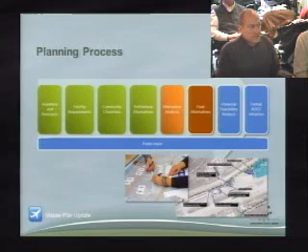The next slide you've seen many times, but I'll just note that we are in the final alternatives portion of the process, and we are beginning to approach the end of this process, so we can bring you a set of documentation and alternatives that you can be comfortable reviewing and approving, hopefully in the April timeframe, which is what we're shooting for.

The concepts you're about to see have been developed through an extensive process with the community: surveys, charrettes, a long list of study committee meetings with broad participation from various interested parties, and presentations to yourselves, the City Council. It's been a long and extensive participation from the community. The charrettes were well attended, and we feel we got great input through our public outreach process that has gone into the refinements you're about to see.

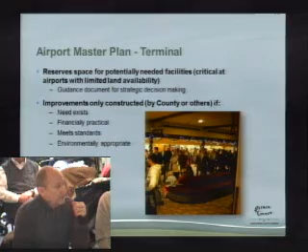What is the airport master plan with respect to the terminal about? We're reserving space for potential facility needs, which is critical at this airport because we have a very confined buildable envelope. So it's really important to be careful about how we use the land here, because we need to accommodate facilities for today's and forecasted uses, as well as try to leave some room for the future.

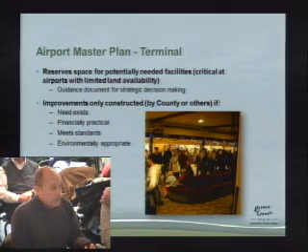Some key points we want everyone to keep in mind: the improvements that are going to be made will be based on need, they'll be financially practical, they'll meet FAA standards as well as our local standards, and be environmentally appropriate.

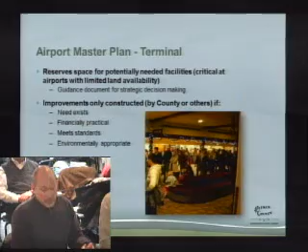We're focusing on the landside improvements. The runway system is in place. You heard more discussion last week about the GA facilities. We're really focusing on the terminal aspect of the project, as well as on the GA, about right sizing, not overbuilding, building what is appropriate given the forecasted use. We went over the slide last week about the concerns of the constituents, the community, and the sponsor, and there's quite a lot of overlap, particularly in customer experience, making sure we understand the consequences of the improvements we're proposing.

I want to remind everybody that the primary goal of the master plan is to provide programming for a safe, operationally efficient facility. That is true not only for GA, but for the terminal area improvements that you're about to see.

In terms of right sizing with respect to the terminal, we're talking about a slightly different set of issues than we were with the rest of the airport presentation last week. We're talking about the airport's land area, airspace limitations, community sensitivities in terms of visual impacts, and especially positive customer experience.

The terminal is really the place where the community is most exposed to how the airport looks, how it functions, how efficient it is, how good we are at providing airline passenger service to our community and visitors. Also a major focus is an operationally efficient facility, both in terms of logical circulation and resolving existing issues like lack of space in the secure hold room and confusion in the baggage area, while ensuring the best connection to existing and future transit systems and a roadway system that's logical and easy to use.

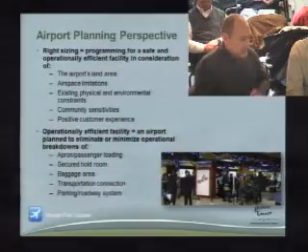The next three slides show a couple of key things. You'll see two asterisks at Baltic and BMC West - those are access points that remain consistent across all alternatives. Last week we focused primarily on the areas shown in yellow. Today we'll talk almost exclusively about the area in blue, the terminal area and its associated potential expansion area, labeled here as potential facilities.

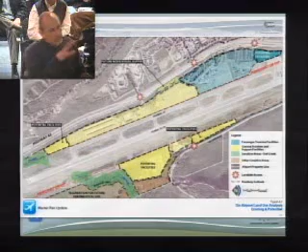One other thing to close the loop on a question Rachel had last week - there's an area of parking occurring in front of the air traffic control tower. Those parking facilities were actually approved. They were done around the time we were reconfiguring how fuel trucks got to the fuel farm facilities, and we needed to expand the maneuvering room. In the process, we took that parking facility through the Community Development Department, and it was approved.

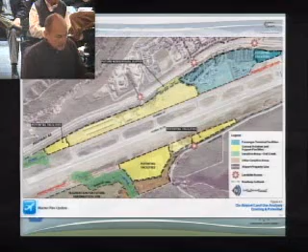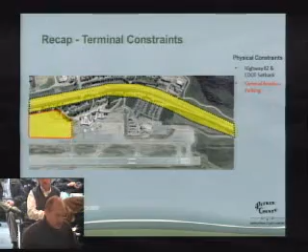The next three slides are just a reminder about the constraints that affect the airport - the highway and its setbacks, the GA area which we talked about extensively last week, and the airfield limitations that create the envelope you saw in blue on the prior slide. This is our sandbox within which we can work.

In terms of what we learned, the key inputs from the community - I want to touch on a few. We heard the facility should preserve an easy, quaint, welcoming feel, that it be easy to use and appealing. Aesthetically, the terminal should blend into the landscape - there was no desire for this to be an architectural statement. People were happy with the current facility's appearance as primarily a landscaped entry with a demure building that's not an architectural standout.

We also learned there's no attachment to the current terminal building - everyone recognizes it has issues and problems, it's been revamped several times, and it appears the community felt its useful life is nearing an end. The last points: it's important to have ease of connection to transit, which was a main theme in all our community input, and all alternatives address access to the existing transit system while keeping flexible for future transit systems.

Lastly, we heard from the public that consolidating parking was preferred, both because it would make it easier with a shorter walking distance and more convenient for all users, and because it allows us to utilize the airport in the most efficient manner. If we're able to consolidate areas currently used for parking, we can use those areas more efficiently for other airport-related uses.

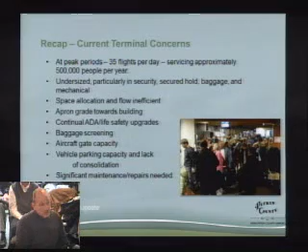I also wanted to note that the current facility has undergone some changes to improve its ADA compliance, beginning primarily with exterior improvements. But there are quite a few interior improvements still needed to improve ADA compliance, and those become important if we look at the reuse alternative. Obviously, all of the new development alternatives would resolve those from the ground up.

In terms of vehicle parking capacity and the consolidation issue, there's a few things to keep in mind. One is the walking distance I mentioned earlier. The second is that consolidating parking is going to be a real advantage in terms of phasing. Keep that in mind as you look at surface parking versus consolidated parking solutions.

Lastly, the most important things we've learned: with respect to the apron, the aircraft parking area, people were okay with continuing to experience the outdoors as they board and deplane. We heard that quite often in the process. We've also learned that improving the separation of loading passengers and aircraft is important. Right now, the way they currently park, people move between and adjacent to the aircraft. The ability to tug them in is limited here because of the grade of the apron, and the tug drivers are reluctant to manage the aircraft that way.

In terms of the terminal, we know about the inbound and outbound passenger flow as a key element. We have a lot of confusion at those entry doors, particularly for people who are both arriving and departing, in terms of where baggage claim is and so forth. The TSA requirements have affected how the airport functions, with people stacking up in the ramped area for security clearance. And finally, the technology related to ticketing is changing, which will influence how the terminal area is designed and how space allocation relative to ticketing is done.

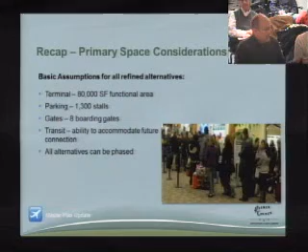So with that, I think we could pause and take some questions on this portion of the presentation, or since we just had a lot of questions, you may not have any others, and we can move on to Scott's presentation. Are there any questions?

Yes, Rob. I have a simple question, and it relates to something Jack said about financing, because I think it's important to have this as a memory in our brain. If and when we get to the financing portion, Jim, can you just explain - we're not talking a new tax in Aspen, this is an enterprise fund, paid for through airline services - because financing is a big part of this decision as we move forward, but having it in our minds as we look at scales of things, understanding how that financing happens, I think is crucial. Making sure - I think there are some reporters in the back - that we're not talking about a new tax here or something like that.

Yeah, thank you, Rob. The airport is an enterprise fund, so we generate and continue to generate our needs both operationally and for capital through collection of landing fees and other fees collected from tenants and such at the airport.

As we think about the financing plan in greater detail, what you'll see is likely a combination of revenue bonds, which are borrowed against future revenues expected at the airport and our ability to repay—not unlike a home mortgage where you expect income and borrow against that forecast. There's also the use of federal grants; FAA grants don't come from April 15th taxes funding these improvements. They come from user fees on airline tickets, air freight sent by airplane, and general aviation fuel sales.

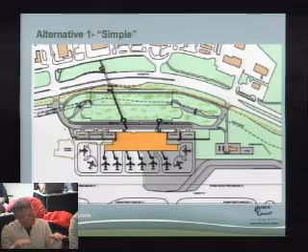What's interesting about those jet bridges, just to describe, is they have to meet ADA standards as well. So the floor height of the airplane relative to the floor height of the terminal building—you have to account for enough distance to make sure they meet ADA. So that's what we were trying to do in a space reservation system.

Have you accounted for—I know in Denver you've got these bridges, but with these planes, with these 700 planes, you've got your carry-on gate check luggage. They've got those little elevators in Denver that bring your luggage up. Now in Aspen you just pick them up on the side of the plane. So obviously that needs to be incorporated into this for a space-saving thing. Other questions on this alternative?

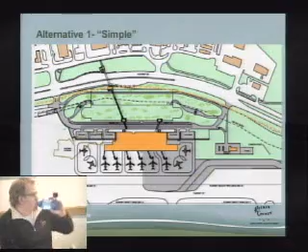Some of the things, in terms of how the traffic flow works: in this situation, you have two-way traffic both at a new intersection down near BMC West and at Baltic. If you're coming in from the Aspen way, you can turn in early and take the frontage road around, then loop in and drop your passengers off or pick up. If you come in at Baltic, you can loop around, leave at BMC West and head back down Valley, or take the frontage road back around depending on where traffic is.

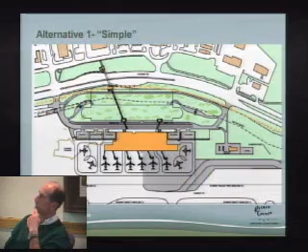On that BMC entrance or exit, I forget in our highway access plan—do we have a stoplight there as a potential down the road? That's a fully controlled intersection. Fully controlled, yes. Okay, Michael? Yes, Jay.

As far as the connection to transit, is that piece right there a space reservation, but not a location, because it can move around, correct? Correct, we can move that around wherever the stops and things end up.

There are multiple processes, but I'm concerned by the evolution of moving it further up Valley, because of what it means from my personal experience, whether it's ABC or other intersections, people won't walk the whole distance oftentimes, and they'll cross the road anyway. I don't know how to address that. If they have luggage, that's different, but if they're going to meet a friend, they might just cross.

I'm thinking of the comments I've heard from North 40, saying it's getting further that way, so it's something we need to be aware of and not make a final decision on yet.

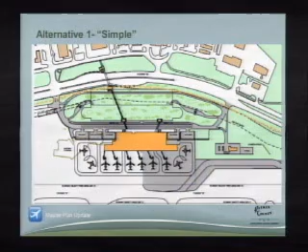Part of that location is predicated on the BRT stops, which will also be in line with the pedestrian under or overpass, so that will all flow in together. That's probably why the planners designated that as your access point. I might be able to address a little of that, if you don't mind.

The underpass alignment is driven by two things: the BRT stop moving a little farther up Valley, and the underpass not making sense right at the intersection because of the number of utility relocates required there, so that got moved up. Really all they did was flip the up-Valley BRT stop so you'd have better connectivity to the terminal, but it didn't change the pedestrians' walking distance at all.

Because the location of the underpass wouldn't be any farther down Valley. Does that make sense?

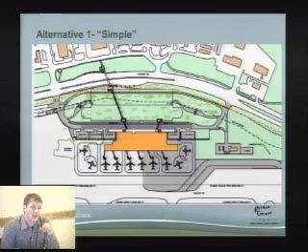Yeah, I thought the underpass also went further up Valley. Not as a result, no. I mean, we don't have any real plans we've had presentations on, but that's the location. We've conceptually had it in different plans.

Correct, and a lot of that has to do with ADA runouts and such, but they're planning to where we think the best location for that underpass is going to be.

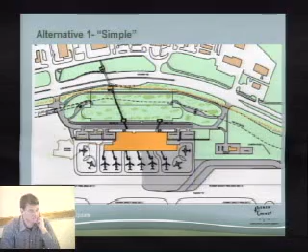From the standpoint of the terminal, the important thing to note is that it's not going further down Valley, because further down Valley gets it further from the terminal redevelopment concept, which for all other reasons makes sense to move further up Valley. If it moves further up Valley, it's better for a redevelopment alternative.

And because redevelopment, under the scenario where we totally build new, speaks for itself — you can operate while you're building new. Yeah, okay, thanks.

Any other questions on this alternative? Well, I'll point this out as we go to the other alternatives: in this one, you seem to have really allocated the different drop-off and pickup areas for bus parking, hotel shuttle vans, and everything like that, but you didn't seem to do that in any of the other alternatives. I was curious. We can explain that.

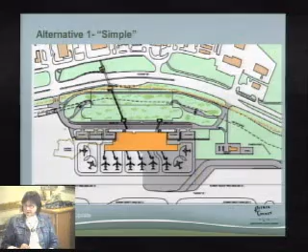A little more complicated. The other thing is that this is actually a two-story system, so you're looking at the second level here, where you see surface and a couple of lots — some of those lots, Rachel, are actually buried in the garage right below. So this is a park-and-wait area up on the top surface for people, fairly close by, and it works pretty well.

All of the ticketing and baggage are out this way. One advantage of this is that it moves — one thing we heard was to move the passenger closer to the Highway 82 corridor for transit, and that's one thing this does. You get rid of your bags and then walk to the concourse, versus having to walk and then get rid of your bags.

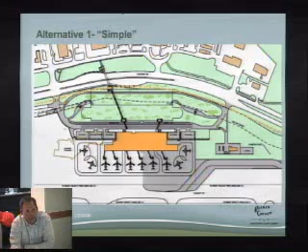The way it works is you go into the parking garage and you're going into the side. This is actually above grade in this area, and then we extend out as far as we can underground in this area. So you have two bays across through here underneath this cover, and then two more bays as you start working down — it doubles its width as it goes down.

So you enter here, you go down a corkscrew to the lower levels, you come out, you come back up, and you come back out. Thank you.

Ron asked: in regard to the terminal buildings, are these all, at this point, planned as single-level buildings? No. Okay, so could you talk about the three-dimensional aspect of these designs as you go through them, like you did with the parking garage.

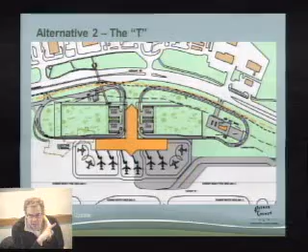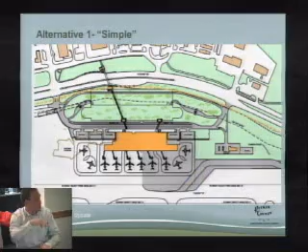If we go back to this case, this is essentially a two-level design. You come in at ground level in the front, and you have a back-of-house area underneath the concourse, where the airlines are and the places you never see in the airport as a public citizen — that's where they move your bags and handle the different security items. You then transfer up to the concourse level. There's a significant grade adjustment on this side as it dives off to the highway, so this is somewhat like a garden level basement going up to the next level. That theme is carried through each one of these in different ways.

Does that help? It does help. Okay.

When you go into the terminal, this is essentially 2 floors all the way through, with the whole bottom floor being used for the non-public areas: moving the bags, the airlines, mechanical systems, or at least a decent bit of the bottom floor. This can be configured a bunch of ways. You could have ticketing on top and baggage on the bottom, or you can flip those. It's all dependent on what ends up coming out of the preferences for the community, with the concourse being the main area on that second level.

Any questions? I think it's important to talk about what happens on the area where the aircraft are parked. Those of you that went on the tour recognize that ramp currently slopes very severely toward the terminal building. That no longer meets any kind of real code. It doesn't allow for airplanes to nose in the way they're described here on this drawing. It's resulted in several floods of the terminal building over the years, but we're going to have to tilt that ramp up as it relates to Highway 82 and that elevation. So we'll have to rebuild all of that air carrier apron as part of work we have going forward, regardless of the plans. Just a reminder about that. We're going to then have to account for that grade shift as it connects into the terminal building and those floor elevations. So that may be difficult to describe verbally here, but I continue to make the offer that anyone who'd like to come to the airport for a tour is welcome to do so and see that firsthand.

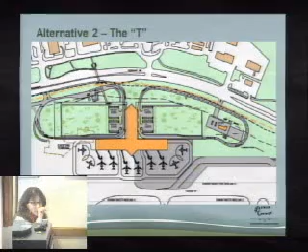Cindy? Can I ask a question about how the pedestrian walkway connects with the terminal? It looks like you have to go outside and make that connection potentially that way. At one point I think we saw an angled T where maybe that would have connected a little bit better to the pedestrian walkway, to get people a little bit more familiar with it.

In this case, the way this can work is if this is an underpass, the garage doesn't extend out, so you're on the surface. We talked about using a covered walkway going out, but you have to cross a road. But you can go out through the covered area of the garage before you go out towards transit. So Cindy, this is underground here, and this is either coming in underground, or it would come into a set of stairs with a covered walkway that would go to the terminal either underground or via an enclosed walkway. I think the most successful pedestrian movements are the ones that are really visible to the person when they come through the terminal. I think just accenting that the most would be helpful for our goals.

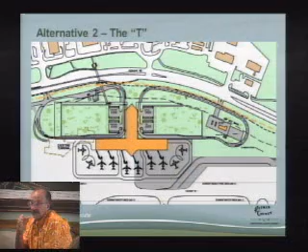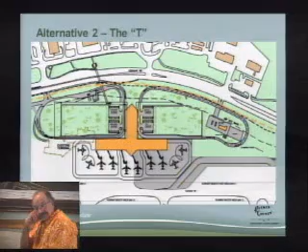Well, you're given a couple of choices, and I hate continuing to have to say we'll go to the next step, but one of the next steps would be the view plane components and what can be done to show what the buildings would look and feel like as they transition, especially the view corridor associated with Highway 82. We can increase the footprint of the building and create a larger footprint, but we still have to account for this elevation shift that's going to happen on this air carrier ramp, which then starts to drive the floor elevations of the main building.

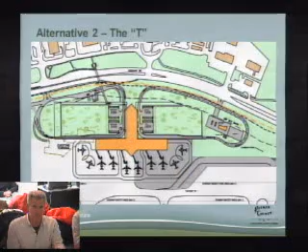So in terms of whether you count it from existing grade or future grade, we can put a lot of stuff underground, but we have to create the square footage somehow to get there, and it's going to involve some higher building because of meeting code off of the air carrier apron. So ground, or grade 0, really is the runway grade outside. That's really not going to change.

So what they did to make it a low-profile building currently is they went below that grade, and that has led to significant maintenance and safety problems.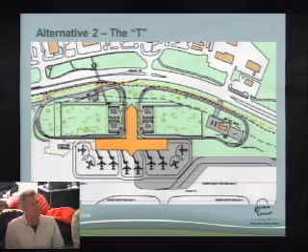Rachel: I was just going to say, I know the concept of whether there were 2 stories or not was discussed at some level. I think it's okay, and I see it going forward as an alternative. You have a great opportunity for views in your waiting area and holding area by being 2 stories, especially if the first story is more of that garden level discussion, not too much. I also look to the Airport Business Center and its development on the other side, and they're 2-story buildings, and I have a hard time saying we have to hold the airport to a 1-story building, but the neighborhood around it can be all 2 stories. So I think they've evolved over time, and the airport's evolving over time.

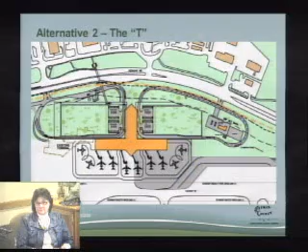If you look at all of the plans that have the consolidated parking, they show essentially a surface plaza that has a lot of potential to help screen the building, as well as make it a really great environment for people utilizing the terminal.

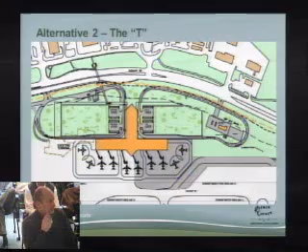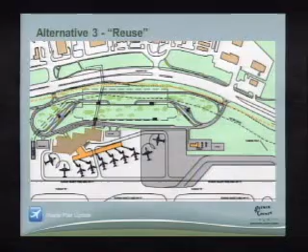Ready to talk about the reuse alternative? Let's go there. Essentially what we're saying in this alternative is that the additional square footage is primarily picked up in the concourse area, and the remaining building, as much as possible, stays inside the existing footprint and is renovated.

Key items here: in terms of parking, you have a similar consolidated parking area to the simple design. The roadway system gets a little more complex, because one of the goals is to have curb frontage. Curb frontage allows you to drop people off, so you need the curb going as much as possible in front of the terminal.

Questions on the reuse? Yes, George. So the parking remains the same in terms of the same area as was shown in the first scenario? It's very, very similar, yes. And same with the egress in and out of 82?

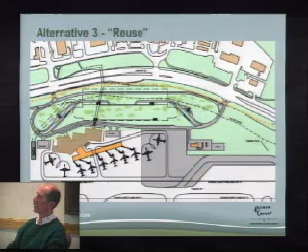Yes. As a matter of fact, George, you may be interested to know that the taxiway lives right here, which is under the FAA air traffic control's control. Every time one of these airplanes has to back out of the gate, they're going to have to call the tower to get permission to back into the taxiway. If you look, the jet bridges are a little longer, so we can push them to the side to give them some more room.

Chad: So as I see it, there's actually another option for reuse, which has a similar concept as far as the concourse, and I don't know exactly how to deal with that issue and avoid calling the tower. You could move it up valley somewhat. Now again, I don't know exactly the planning and current ability, but also we don't have to redevelop all that parking.

I'm not seeing a reuse. To me, there's an option here that's not on the table, which is maybe the 10-year option while we grow into needing the facility that Rachel talked about in 2027. Yeah, not exactly, I just make sure it's in 5-year increments.

Therefore, we don't do all that parking. We reuse, and there's got to be internal renovation to some degree. We're not defining all of that, but I think there's another reuse option or an intermediate step before going to this. I assume with this reuse we could phase things - we could not do the parking, and even if we weren't ready to do a complete new terminal, there could be an evolution of parking as part of phases too.

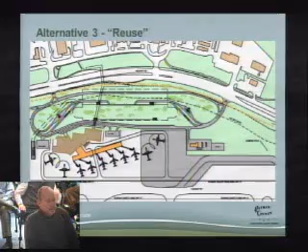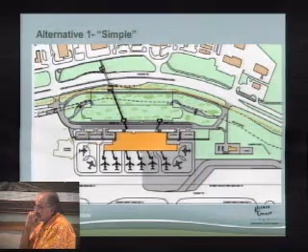Jack, you're exactly right that it can be phased off the existing terminal. Say this was a long-range plan of what you wanted to do - you could have a temporary connection into the existing terminal and build a portion of this concourse as a first phase, knowing that if you ever wanted to go further, you've laid out a plan that could happen 15 or 20 years from now.

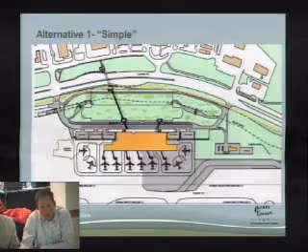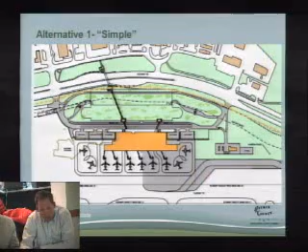One thing to think about with the parking is that the area projected to be used to park aircraft is currently the long-term parking lot, so we have to find a home for that. And at some point you also have to find a home for employee parking and long-term rental car storage. That's a factor we're having to work into all these scenarios as we go through them.

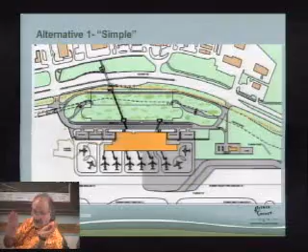That goes back to the original opening statement and conversation with Jim and the individual who said, 'Frontier's left, why do we need to do this?' Well, for me, a piece of that is - we won't need to expand for additional planes because we can do 8 now. Was that what I heard? Not saying it's perfect. No, we know that's not the case. But anyway, it's all phasing, and that's another conversation.

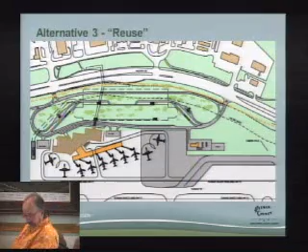One of the keys as we look further on the horizon is that phasing plan, and there probably will be economies of scale to do certain things at certain times because they fit well together. That level of detail is still in front of us, but we've tried very hard to make sure every one of these concepts can be reasonably phased. We've thought about how it'll impact operations when improvements are going on. So this is an evolving and maturing process.

Ready for alternative 4?

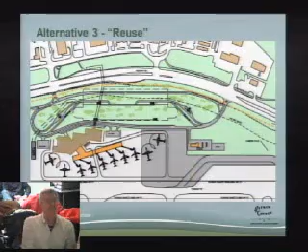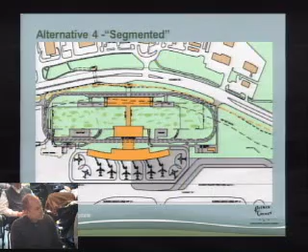I have a question regarding that concept of having transit be more integrated with the airport. Have there been any discussions with RFTA or the potential of the buses going up and down Valley, or maybe a portion of the buses, taking a loop into the airport road?

For probably 3 to 4 years we've been discussing with RFTA in different portions, and in most cases what we've heard is we do not want the buses to leave the 82 corridor. So that is what we've heard from RFTA themselves in relation to BRT and their mainline buses.

That doesn't have to do with circulators - that could be funded through different entities or other ways, but that is what they've told us about their main run. So in all of our cases, we're trying to move the terminal towards the bus stop because we've been told the bus stop will not move towards the terminal.

And just to add to that, in our North 40 planning group meetings over the last year and a half coordinating with all of this, what we heard from the North 40 residents is they would really like to have that loop system so they could have a shuttle go through the 100 road, past the North 40 entrance, and somehow come back around and make a loop through this road system that would be more efficient, getting back into town rather than catching the main line RFTA bus as the commuter kind of transit.

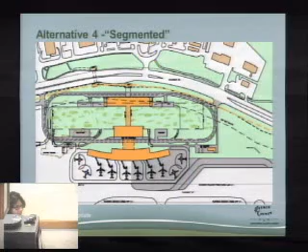But it is a growing need from what we're hearing in our west of Castle planning efforts. Really, if you think about that, once you have the people in a shuttle, if there were a shuttle system that serves Burlingame and North 40 and this whole area, you might as well bring them to the terminal, which is set back from the highway.

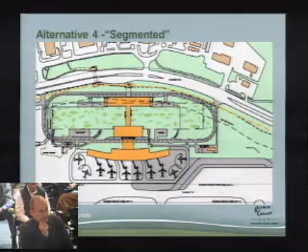That goes 50-50. I'm not a transit planner, and you need so much in origin and destination studies, but you sometimes lose your ridership from Burlingame because they're like, why are we going all the way out, looping through the North 40 and through the airport, and then loading when I just want to get to work in town. So again, there's always trade-offs of how long the trip time is before people jump off the trip.

And the intent of BRT, I believe, is completely corridor-oriented, focused on the main trunk line. It's an express bus system. So additional future discussions about other shuttle systems or pieces of additions is a very future discussion.

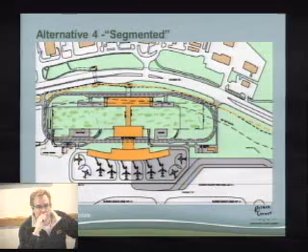And we have this at the Owl Creek intercept lot - the buses come off, pick people up in the parking lot and come back on. A skier shuttle or Highland shuttle. Only certain shuttles do that. They do go to Burlingame.

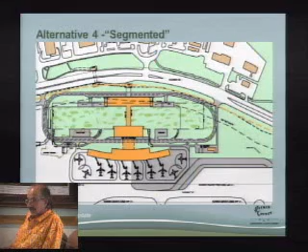There are no plans along these lines, but we do have a record of decision that references other transportation modalities we're trying to stay conscious of while we do this design. I believe it was a light rail line. Obviously there are no plans right now in the works along those lines, but as we've been looking at transportation corridors or transit corridors, it's not just RFTA, and it's not just the buses.

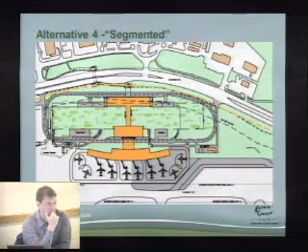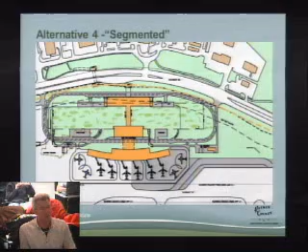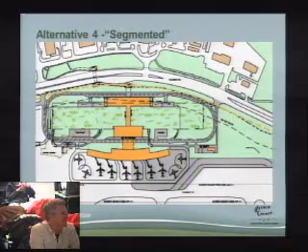It was just an interesting thing about the record of decision - it had over 3,000 parking stalls at the airport as well. FYI, and it never talked about funding it or the character of the community. Any other comments on alternative 4 before we move on?

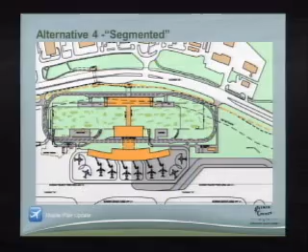Clarification point: besides the 200-foot setback from the highway right-of-way, the county commissioners required that no building be higher than 14 feet for the first 30 feet. In fact, if you take any point on the highway, there is no two-story building visible from that elevation, so everything effectively and visually is no more than one story.

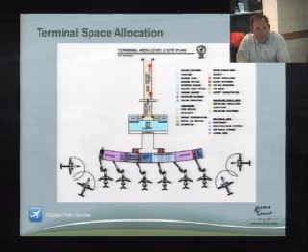We wanted to show how these work. In this case, we're talking about what we're calling the segmented layout. What happens is we're following the flow of people going from when they get off the plane to when they get into their vehicle leaving the airport. You start in the hold rooms, walk out of the concourse, go over top of the road headed towards ticketing, and then start ramping down. Now you go down to the first level in this structure. In this case you've ramped over top of ticketing, and you're headed out to baggage claim. Then you hit baggage claim, and you can either go out to commercial operators or head back into the parking garage. That's just to give you an idea - each one of these has that type of discussion done on those functional blocks that you see.

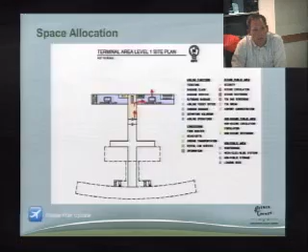Any questions on the surface flow before we go into surface parking evaluation? Essentially, what you're saying is they can get out of the airport, right? We've thought about it - it's not just a blob on a piece of paper.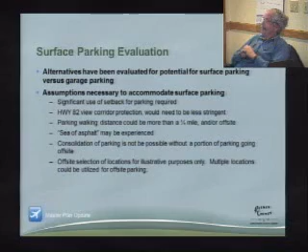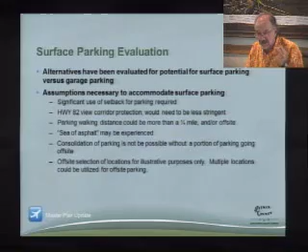Okay, in terms of - we heard that... you have here terminal area level 3, 2, and 1 site. So there's 3 levels? In alternative 4, there are 3 levels, yes, and part of that attaches to underground parking. So that's okay, thank you.

We heard the discussion and wanted to go through the surface parking evaluation with you.

What we did is we said, okay, let's figure out how we can consolidate parking for the airport and what it's going to take to do that.

Assumptions: there's going to be significant use of the setback required. The 82 corridor that currently is protected somewhat from views, it's going to be a struggle to try and protect the parking from those views.

Distances, we said, okay, quarter mile, that might be okay. We use the term sea of asphalt. Another analogy would be, think of Glenwood Meadows. It's very efficient for its use, but from what we've heard, that isn't what people want in this community for their parking lots.

Consolidation of parking is not possible without a portion of parking leaving the 82 side of the airport, at least as we can see it, if you want to make efficient use of other areas along the side of the highway for general aviation and other uses. And a key note as we move into this next slide that you've all seen already in your packets: we looked at publicly held parcels within the area of the airport, and we just chose one parcel for illustrative purposes. It was the BMC West parcel because that is publicly owned, and it's right across the intersection. In no way is that supposed to say that that is what it's supposed to be, but that is one option that we saw in terms of a disturbed site that could be used.

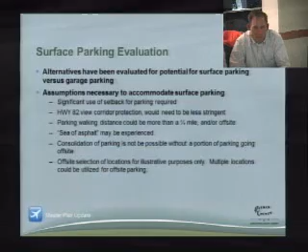To give you an idea on parking, we have the functional areas. The red are the general aviation parking. Some of those are long-term parking, some of those are pilots. Orange is the control tower's parking lot, that is essentially fixed by function, the controllers work there. You have your short-term lot in yellow and your rental car pickup lot in yellow. And then you have your long-term and employee parking lots, and then the rental car storage.

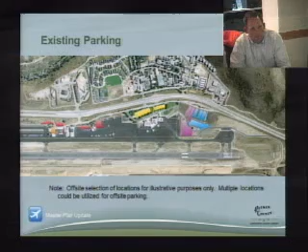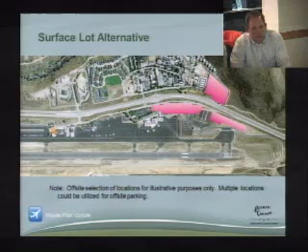In the case of looking at surface lots, to get 1,300 positions, this is essentially what you would do is you'd move those into those areas. We'll show this layout here in a little bit. In case of a parking structure, you take those same areas and the disturbed footprint is significantly less, consolidated in one location.

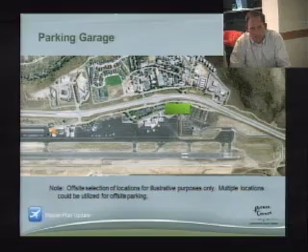To give you a layout of if the simple alternative was being looked at, this is how that could work. Since you do have to look at this in relation to fitting and parking, you can see the 100-foot setback line in here. In talking with community development, we understand that parking can be in the setback. It's not something that we would choose to do unless we have to.

In looking at this in relation to walking distances for customers, there's about a 300-foot walk to the back of the short-term parking lot. So the radius that you see there is about a 300-foot lot from the center of the terminal. And so short-term can be covered in the lot right in front of the building. Just a clarification: that represents the distance to the existing, the edge, the furthest parking space in the existing lot.

In the case of the long-term parking lot, we took a radius to the farthest point in the long-term lot, and that's this line right here. And then we went to the functional boundaries of where people could go, and that essentially encompasses the majority of this lot here. You will have employees and long-term extending out in this area in order to get the number of spots that seem to be needed. And rental cars, the long-term rental cars will most likely be across the street.

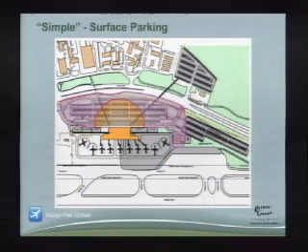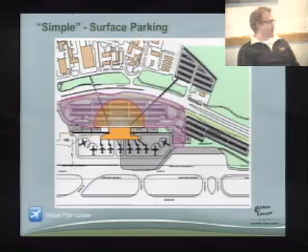What I'm not getting here is why we cannot take the existing parking footprint, which is what I almost need here, like a Mylar, and put this alternative, the simple alternative for a terminal in there and make it work, other than the need, of course, to connect to transit. I understand that. But why can't a considerable portion of this airport remain the same and you put an improved terminal on it?

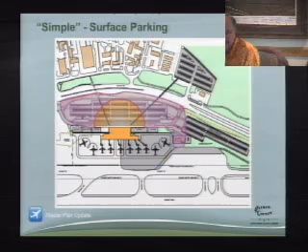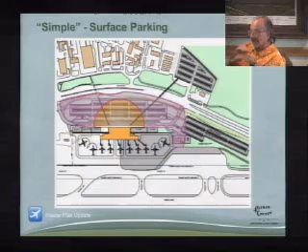What is now and why doesn't it work, the parking? I'm not sure it doesn't work. Now, there are certain peak days I know I drive through that lot and there's not a space. So I'm not saying no, never, ever, but as a phase, the things we talk about for phasing is what I want to know.

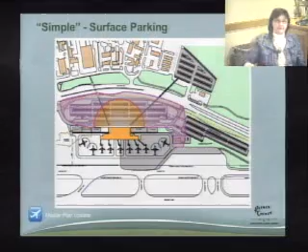I believe we've gone through the questions and comments on parking, Michael, or are there more? Are there more from the commissioners on parking?

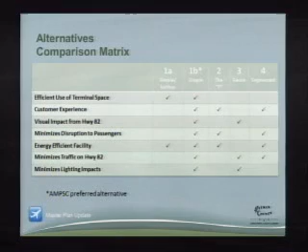At this point, similar to what you had for general aviation, we prepared an alternatives comparison, we call it an alternatives comparison matrix. You're going to have the same baselines on all of these alternatives: connections to transit, as much as possible, efficient use of the space, and some of the other items we've talked about already. The design criteria, when you get into how the facilities work, that will come in later phases. But what we did is we looked at some of the key components we heard from the customers and from the different study committees and the charrettes, and we looked at efficient use of the terminal space, customer experience, impacts, minimizing lighting impacts, traffic on Highway 82.

And in looking through those, reuse had some issues with the customer experience. We looked at it saying that for the construction phase, it would be very impactful on the customer. And you still have the layout of the existing terminal to try and work through. On the surface lots, you're extending their walkway, their walk. And we went through each one of these in that similar fashion. And that simple alternative keeps coming up as something that seems to make sense.

You have a simple 1A, 1B, but did we discuss that? 1A is the surface lot. The surface lot, yes. 1B is with the consolidated. So the only difference is the parking scenario. Correct.

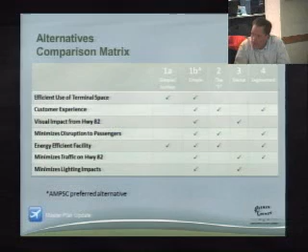Just like Mark talked through last week, we've done some costing for comparative purposes only, and the similar disclaimers that you received last week still apply this week. Federal funding, private investment, phasing, inflation—all those things are not included. These are for comparative purposes only, as you'll see on the next slide.

1A is the simple alternative with a surface lot. The terminal facility for 1A and 1B are the same; the difference is in the parking facilities. We included procuring land for 1A versus a parking structure for 1B. As you go through each option, you'll see these differences.

Beyond the parking difference, a major difference is in functional square footage versus actual square footage. The T option has about 20% or 20,000 additional square feet and requires more baggage conveyors. So that's 60 million versus 35 million.